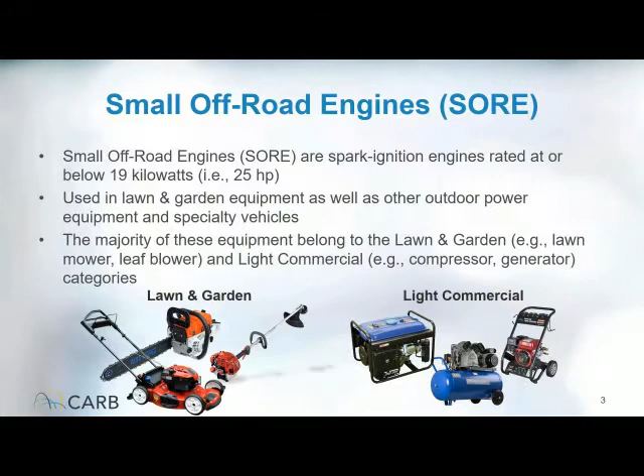Slide number 3. Sam already described what small off-road engines are. Most of them are used for the lawn and are spark ignition engines, less than 19 kilowatts or 25 horsepower. They are used primarily in lawn and garden applications and other outdoor power equipment and specialty vehicles. Examples shown on this slide include lawnmower, leaf blower, compressor, and generator.

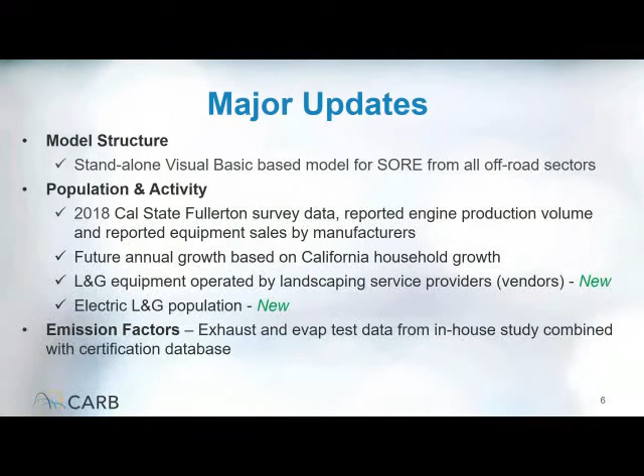And now I'm going to turn the time to Debbie Futapa, who will briefly summarize the 2018 Cal State Fullerton survey. Okay, thanks David.

The next slide, please. The Cal State Fullerton SOAR survey was completed in May 2019, and consisted of a telephone survey of 1,152 households, 1,350 businesses, and 629 vendors. Overall, residential results made up 37% of the total survey, 43% for the business sector, and 20% were vendors or landscape service providers. Next slide, please.

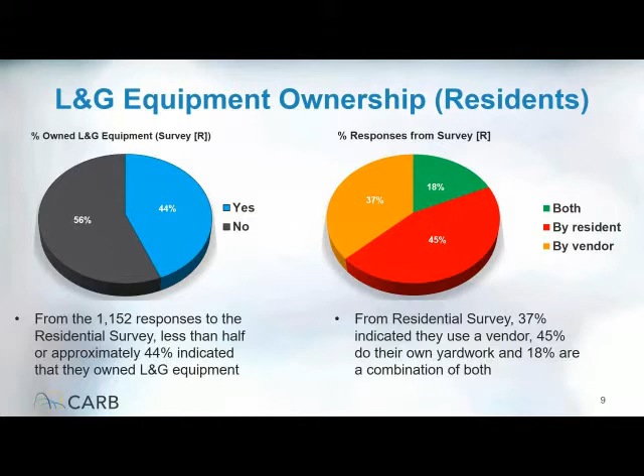From the residential survey, 44% of respondents indicated they own lawn and garden equipment. In addition, 45% of respondents do their own yard work, 37% use a vendor, and 18% use a combination of the two to maintain their landscape. Next slide, please.

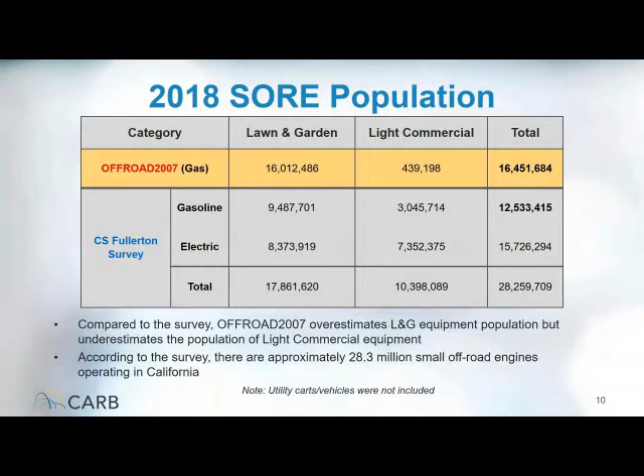The Off-Road 2007 inventory contains 16 million pieces of gasoline lawn and garden equipment, including lawnmowers, trimmers, and blowers. In comparison, the survey population of gasoline equipment was about 9.5 million. Additionally, the survey indicated approximately 8.4 million lawn and garden equipment that are electric powered, or in total 17.9 million lawn and garden equipment in California. For the light commercial category, which includes generators, pumps, and pressure washers, the survey showed approximately 3 million gasoline and 7.3 million electric equipment, indicating that Off-Road 2007's total population of 439,000 was underestimated for the light commercial equipment category. Next slide, please.

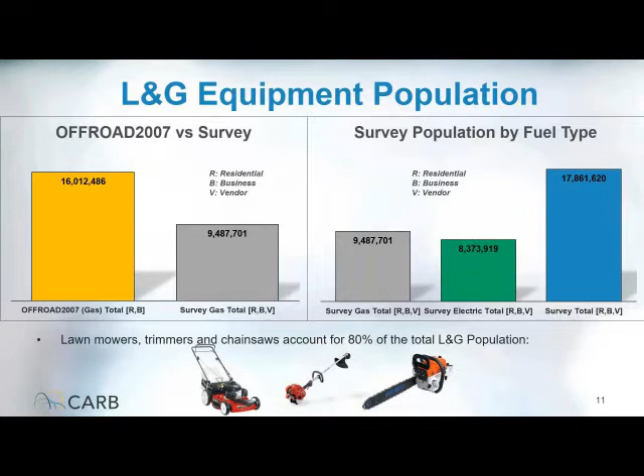Slide 11 is a visual representation of the previous slide and compares the population from the survey in blue to Off-Road 2007 in yellow for lawn and garden equipment. Next.

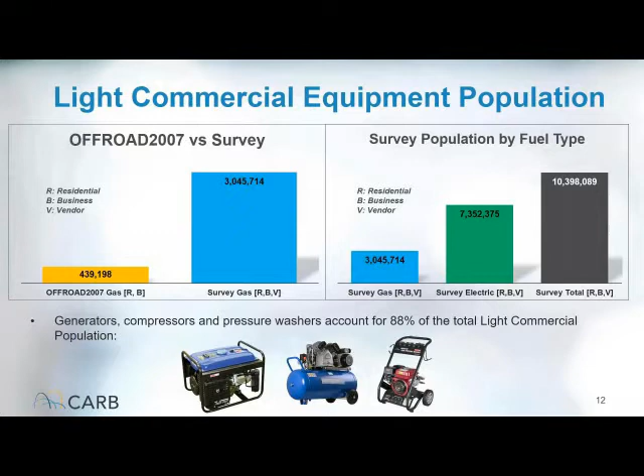Similarly, slide 12 illustrates the population of light commercial equipment from the survey, shown in blue, as compared to Off-Road 2007 in yellow. You can see there are approximately twice the amount of electric light commercial equipment in green as compared to gasoline-powered in blue. Next.

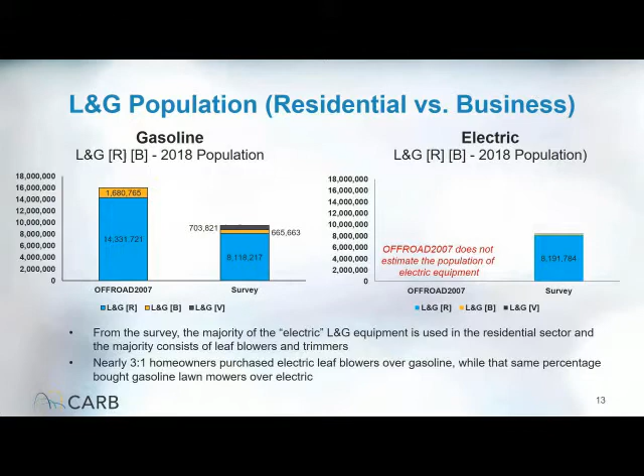Here is a comparison of lawn and garden equipment by sector and fuel type. The survey showed that the majority of electric lawn and garden equipment is purchased by the residential sector, and gasoline-powered equipment is utilized to a higher degree by businesses and vendors. Next.

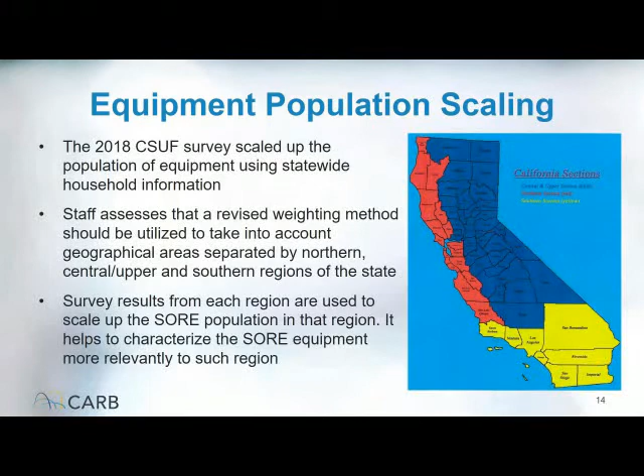To refine the allocation of SORE equipment from the survey, the state was divided into 3 regions: northern, central upper, and southern. The survey population was scaled to reflect household information from each of these regions.

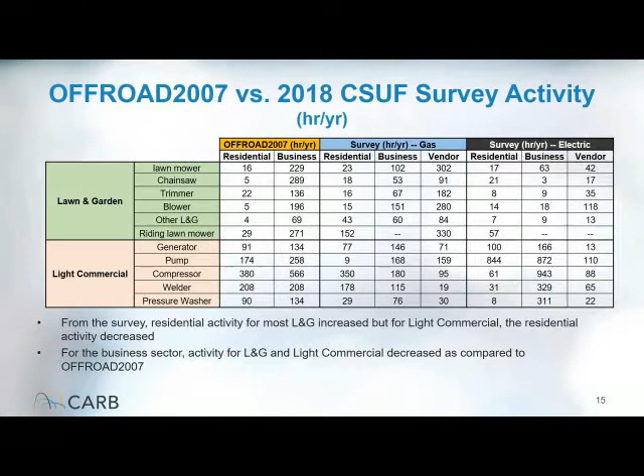Slide 15 compares the activity or annual hours of use from the survey versus Off-Road 2007. In general, the survey indicated that residential activity for lawn and garden equipment increased, but decreased for light commercial equipment. The activity in the business sector decreased for lawn and garden and light commercial equipment as compared to Off-Road 2007.

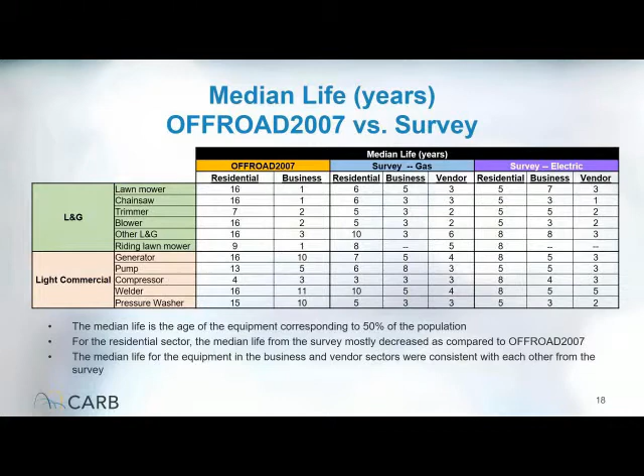Slide 18 illustrates the median life of gasoline equipment in the lawn and garden and light commercial categories obtained from the survey. The median life corresponds to the age when 50% of the population is still in existence. In general, residential equipment have a higher median life compared to their counterparts in the business or vendor sector, primarily due to their lower annual usage, which is reflected as an increase in equipment longevity.

Okay, and next Walter Wong will present the development of emission factors.

All right, thank you, Debbie. Hello, my name is Walter Wong, and I work in the Mobile Source branch under David, and I help with Kashan and Debbie to put the inputs together for this model.

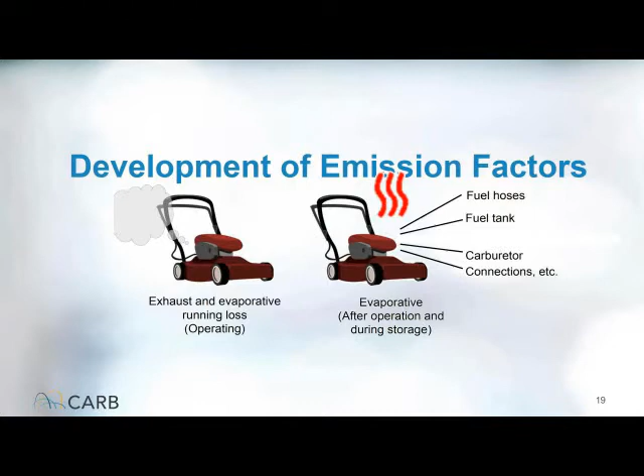So for slide 19, the development of emission factors. Emission factors are broken up into exhaust and evaporative emissions. When the equipment is used, there's exhaust emission and some running loss evaporative emission. When not running, evaporative emissions occur, usually through the fuel hose, fuel tank, cap, and carburetor. We will first look at exhaust emission factor.

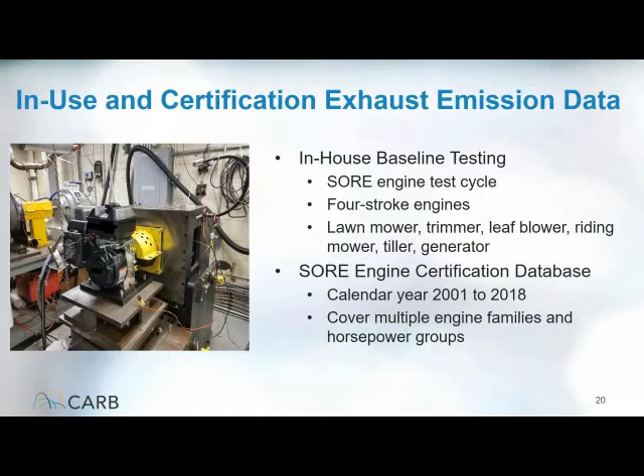In our modeling, exhaust emission factors are based on data from CARB in-house testing and the small off-road certification database. CARB tested 11 new four-stroke equipment such as lawnmower, trimmer, tillers, and generators over the last few years. We used those test data and averaged it with data submitted by manufacturers when they certify their engine with CARB. Where we don't have test data for equipment type, we use submitted certification emission factors.

In slide 21, these are the comparisons. Whoa. Hello?

All right. Slide 21. These are the comparisons of in-house test data. Is there a feedback somewhere?

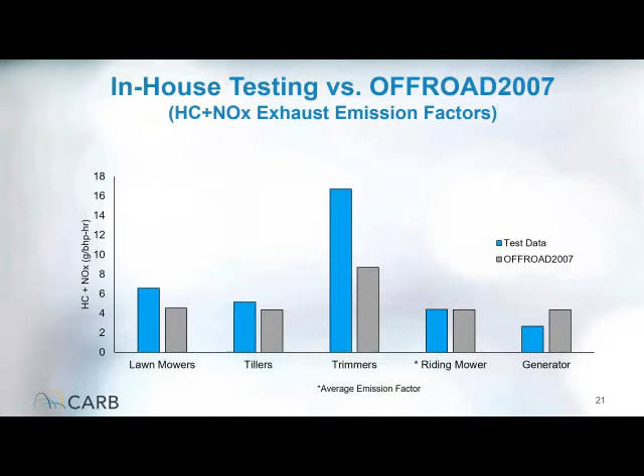Okay, these are the comparisons of in-house test data versus what is in our off-road 2007 model. For these selected equipment, in-house testing shows that HC plus NOx exhaust emission factor was generally higher than off-road 2007, except for generators.

Slide 22. This is the compiled certification database for all equipment for 2018. Generally, the numbers don't change too much year to year. Two-stroke gasoline or G2 carbureted engines have higher emission factors, and four-stroke gasoline G4 fuel injected have the lowest emission factors.

Okay, am I back on? All right. Next slide. Next slide. It's taking a while to change the slides.

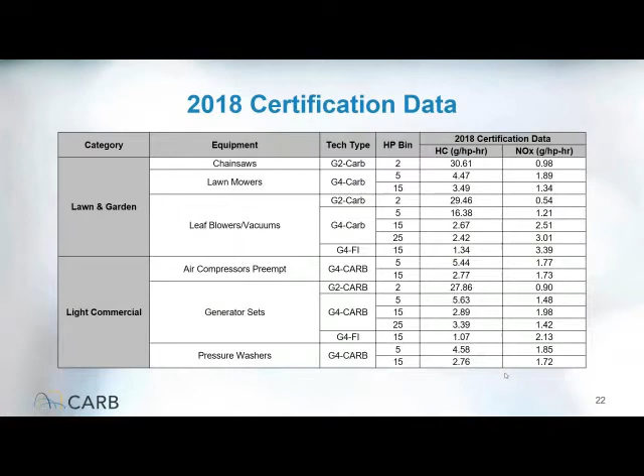All right, next slide.

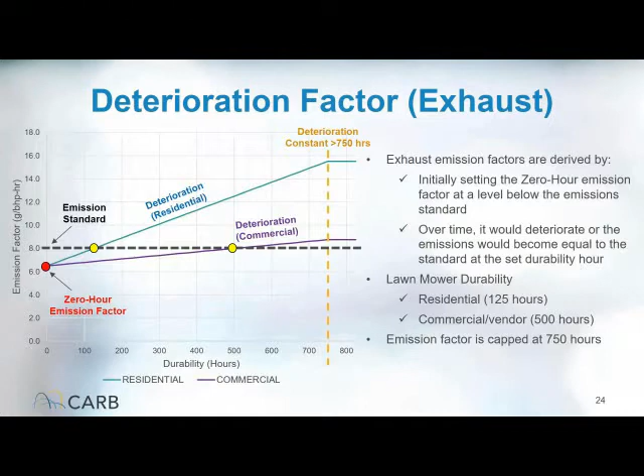In the previous slide, we presented the 0-hour emission factor. The other part of the emission factor calculation is deterioration rate. So usually 0-hour emission factors are set below the emission standard, as seen in that little red dot. We set the deterioration to meet the emission standard at some durability hours. In this example, for less than 5 horsepower lawnmower, for residential population of lawnmower, the lowest of the durability hour range of 125 hours is used. For commercial population of lawnmower, we set the durability hour at the high end of the range at 500 hours. We also set a cap rate where the equipment does not deteriorate but stays constant after certain hours at 750 hours.

These are the load factors being used in our model. They remain the same as what was in Off-Road 2007. Generally, the lawn and garden category has lower load factors, and light commercial has higher load factors.

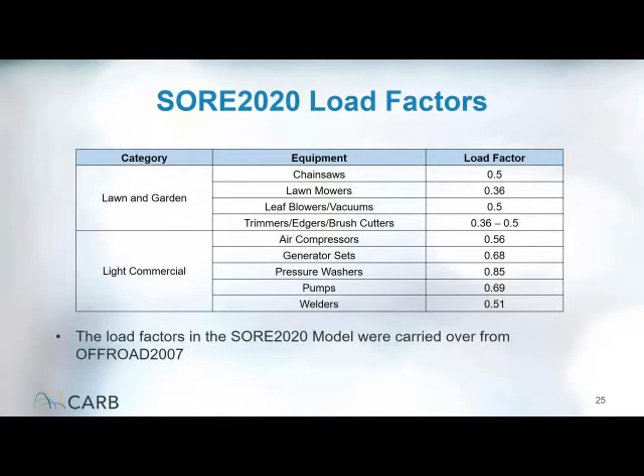This is a comparison for average horsepower used as input. Generally, for lawn and garden, the average horsepower is slightly higher than in off-road, and for light commercial it's similar. For example, the lawnmower had 4.6 horsepower, while off-road had 4.

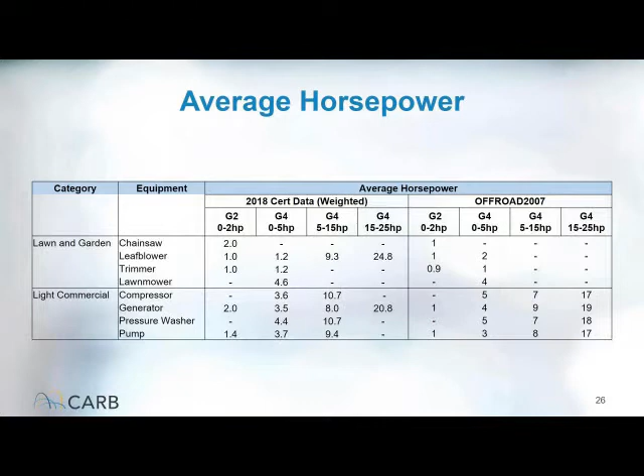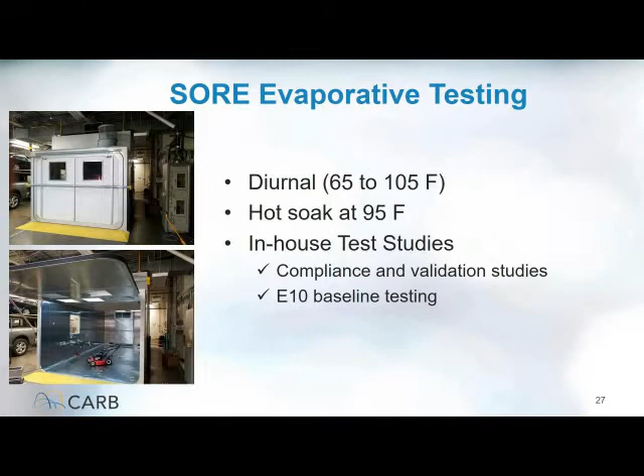The next part of the inputs is evaporative emission. Evaporative emission for diurnal and hot soaks are derived from CARB comprehensive testing of 71 equipment tested during compliance and validation studies performed by our monitoring and laboratory divisions over the last few years. We are not able to use the SORE certification database since most manufacturers don't submit evaporative testing data.

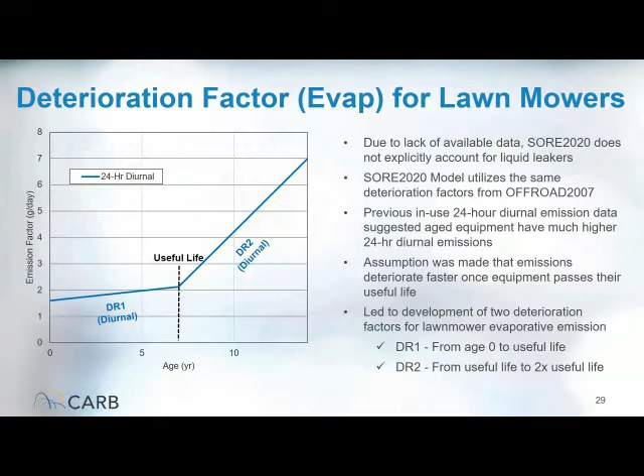Before we go into the population and growth forecast, we'd like to make a brief statement. We recognize that the COVID-19 pandemic has had a significant impact on different sectors of the economy in California, and the related shutdowns and restrictions may have reduced landscaping business activity over the past couple of weeks. The equipment population and emission projections we are presenting today are long-term forecasts and do not account for the near-term impact of the COVID-19 pandemic on small off-road equipment.

However, as we move forward with development of this inventory over the next six months, we will closely track and monitor the ongoing impact of COVID-19 and will make any necessary adjustments to the assumptions presented today when data becomes available. Next slide.

The 2001 and 2012 ARB surveys provided population estimates for lawn and garden equipment type, while the 2018 survey had both lawn and garden and light commercial population estimates.

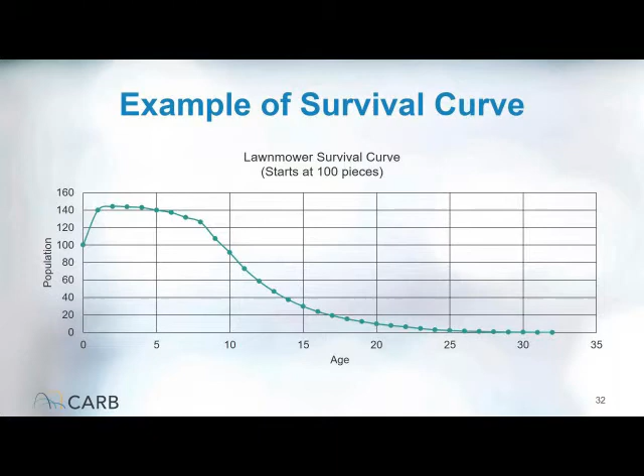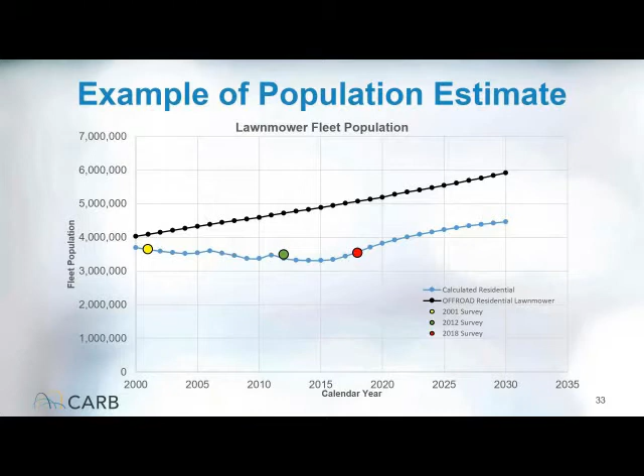We think the household growth rate is a better surrogate because of its stable growth, and it seems reasonable that the number of lawn and garden and light commercial equipment per household should not change too much.

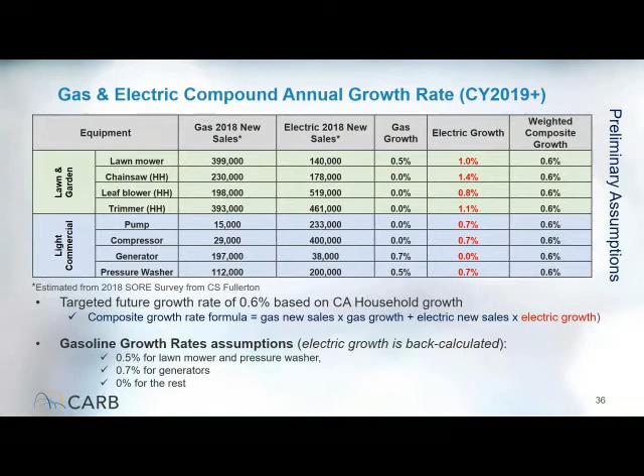We will now share some of the preliminary results from our modeling. Next.

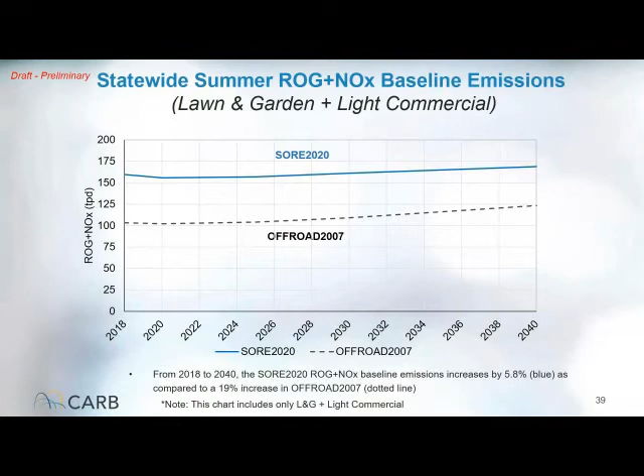These next few slides break it down to see the difference for ROG and NOx. Similar to the population comparison, for ROG the SORE 2020 projection is lower than Off-Road 2007 in the lawn and garden category and higher in the light commercial category.

The main factors for lawn and garden equipment that changed compared to Off-Road 2007 are: population is lower, but activity and average horsepower are higher.

Also indicated on slide 26, lawn and garden equipment has slightly higher average horsepower, and evaporative emission factors for lawnmowers are higher by 50%. So all these factors make up what goes into this modeling. For light commercial, population change is the main driver of the big difference.